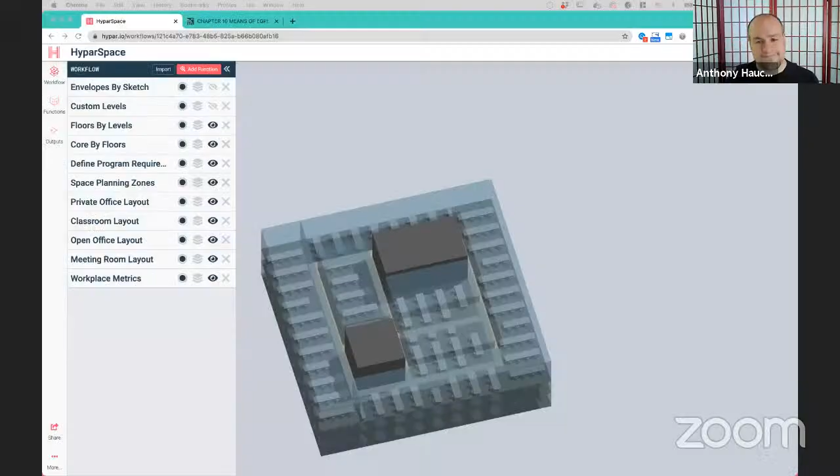Thanks for letting me share with you all today. So one of the things that we want to talk about is the history of overrides and how we got here. For those of you who aren't familiar with what we're looking at, this is something that we're calling HyparSpace. We don't have the best terminology or the correct terminology exactly figured out for what we want to call Hypar space, because Hypar is not space planning, but you can do space planning on Hypar. And this is an example of one of the more fleshed out things that you can do on the platform.

Hypar Space was envisioned by Andrew, who is here with us today. One of the things it shows very well is this transition, this evolutionary history of how overrides came to be and how powerful they can be.

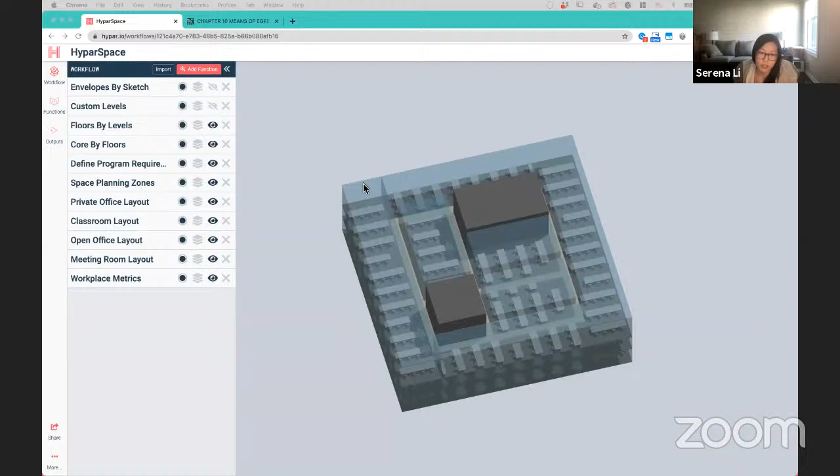One of the things we can see here is you get a bunch of floors, and then there's this automatic layout of a couple of cores and a couple of spaces. What ends up happening is you can go into the space planning zones, or since there's a lot of information happening, you can just click on every space you'd like to change something about, and then change the program type. So downstream functions are listening and saying, oh, if this is an office, I'm going to lay it out a certain way, but if it's something else, I'll lay it out differently.

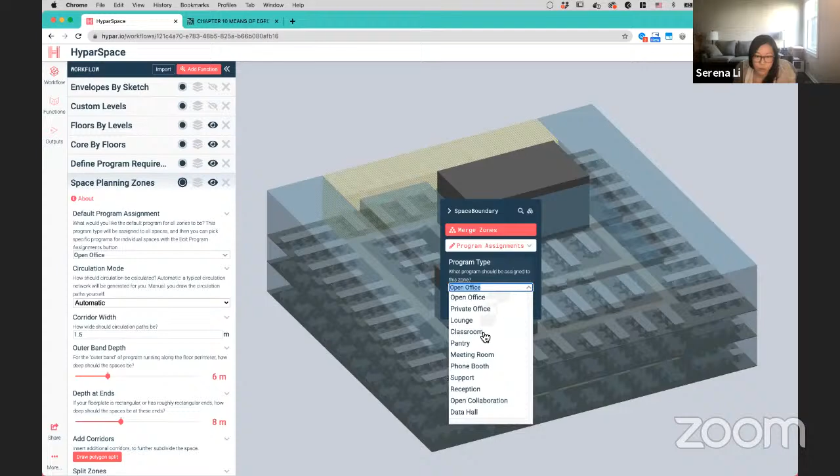So if we change the program type here to something like a meeting room, for example, and hit save, we can see that just this one space turns into a meeting room.

The evolution here is that it used to be we would have inputs for a function — we'd say everything I get fed, I'm going to make an open office. That's how it started, making all of these open offices. What we can do now is start saying, actually, I the designer, or whoever, I know better, and I'd like to change this to be something else.

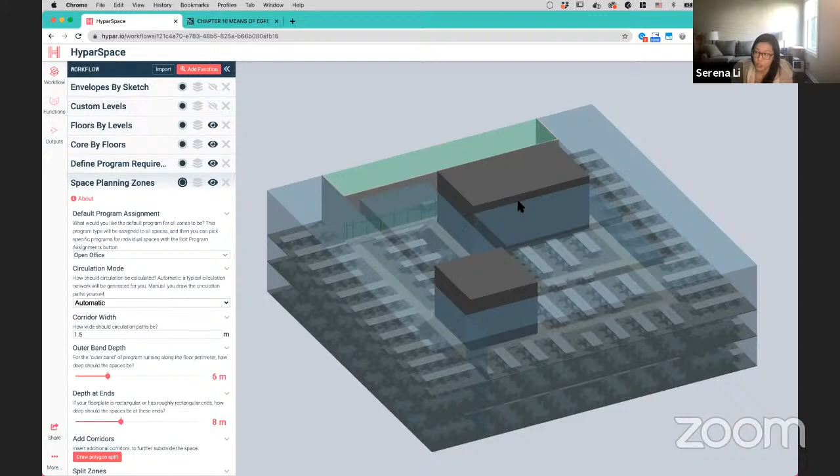So here, well, I chose a very strange and awkward room to make a conference room. I'm just going to go ahead and change that to something a little less weird of a layout for a long skinny space.

But you can kind of see that, okay, we can say this is going to be one kind of thing — and oh, I'm clicking on the wrong thing, my apologies — and that we also want this to be something different, and so on and so forth.

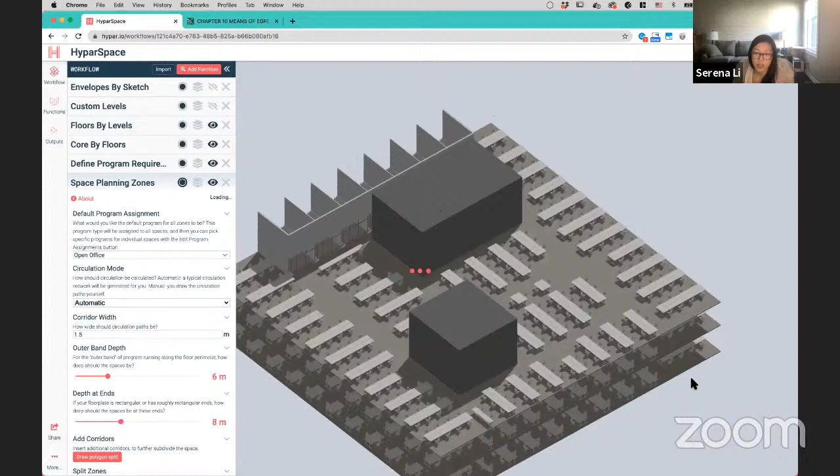This is how we can think about what we've been calling overrides — I personally like to think of overrides as just fancy inputs that you can change by element. Rather than a global input for everything that functions do and how the logic is supposed to work, we want to say, actually, they vary, and I want to work as a designer in concert with the generative design programs rather than just being handed a black box for what it is we want to do.

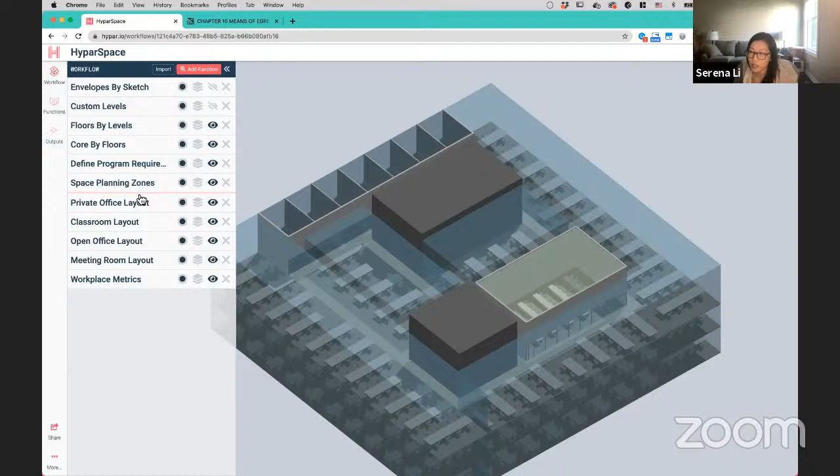I want to linger on that last point, because what you're seeing here is generative design happening where all of the spaces were drawn, corridors were created, cores were created, and you've got a space layout.

But this generative design was very simple and just said, I'm going to make everything open offices. This is a case where it's not like our design got us 90% there — it was obviously not correct. But it's okay, because we're able to have this human intervention right away.

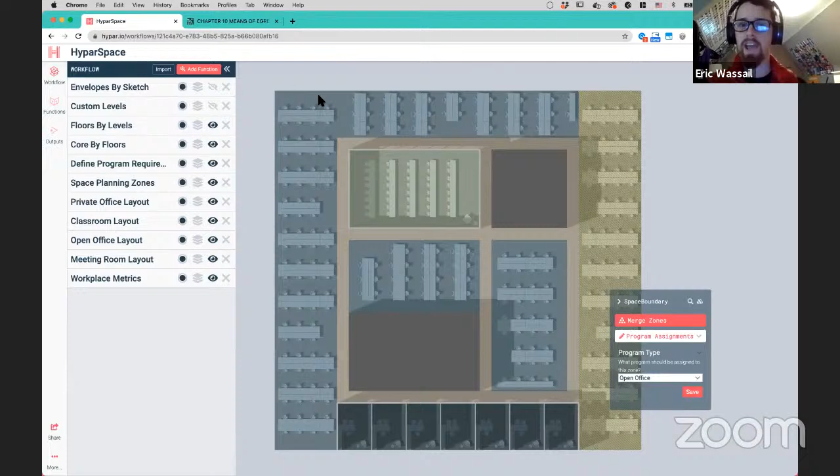Even though it looks like you have to click every space type and make these modifications, it's still human-in-the-loop generative design, because the generation happens first and the human gets to provide input and direction on top of that, which we think is unique to Hypar — a lot of other tools are manual first and then generation gets layered on top, or there's generation and that's the end of the story.

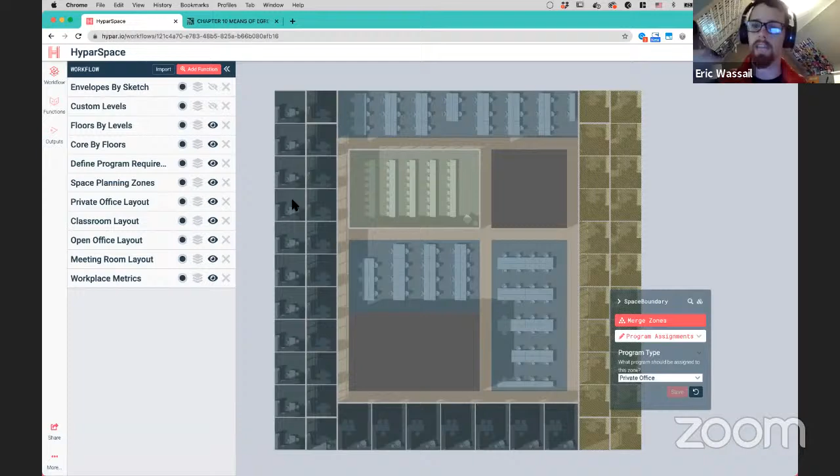You generate your design and can take it and start doing manual edits afterwards, but then you're leaving the generative platform. So this we think is a unique strength of ours — that we're generative first, and we've added this manual intervention capability through inputs on elements, like Serena said.

You can click on an object and say, make this one a little different, change the type, and there are other things we can override, like locations and positions, and it's always responding to a generated design that precedes your edits.

Yes, these are really good points. One of the things I'd like to show is, like, the last thing I was changing is just the category of this type of space. But actually everything down to the geometry, depending on how we configure the functions and how function authors want the logic to work, is configurable.

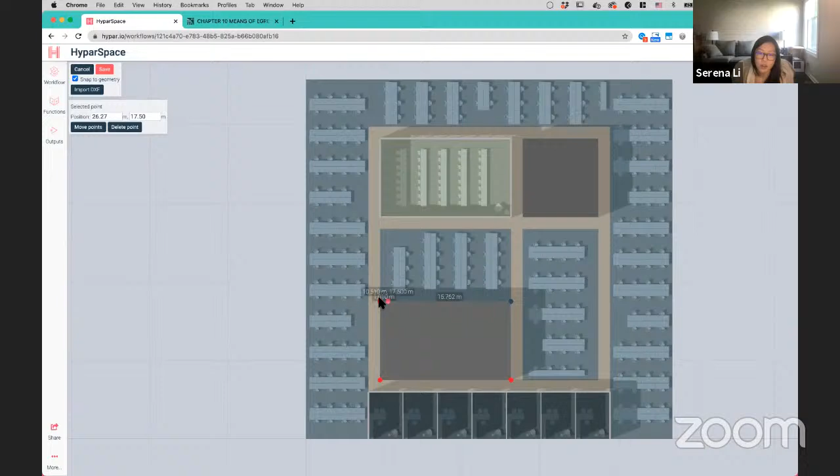One of the things we can also do is take this particular service core and say, actually, I want to edit this core. I want this core to be enormous for some reason, and I want it to take up the entirety of this whole section, and we can just do that.

So cores aren't the primary purpose of a building now, most of the building is core. But what we could do there is core by floors - it gave us a first estimate of what you might want to be doing. Now what we can do is go ahead and edit what comes out of it, and it runs recalculations and does the appropriate things, taking into consideration what a human wants to happen.

And all the previous edits you had made always persist, right? Generation reoccurred, but your modification of that space to be a classroom, and the bottom bank to be a bank of private offices, all continues to exist and continue in your design.

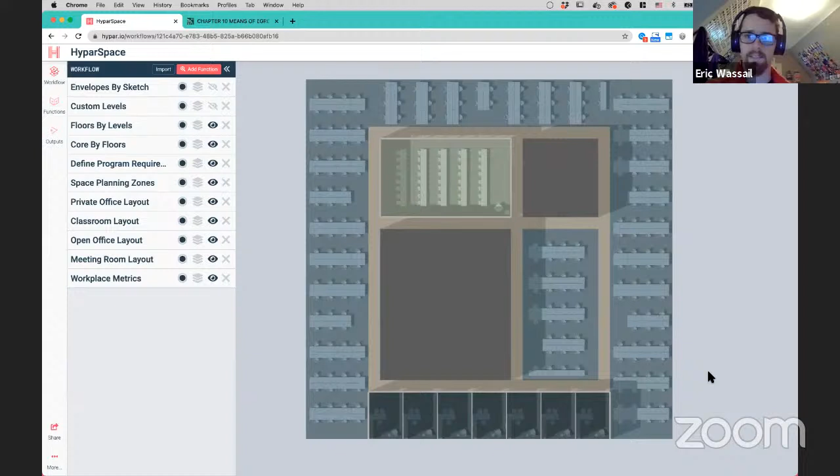Yeah, I wanted to interject on that. We so far think this is actually unique to Hypar - this ability to intervene in a generated design, regenerate the design, and preserve all those changes.

Now, of course, if we radically change the shape of this building to the point where that meeting room no longer exists, we're not going to preserve that. There's a certain tolerance for change that the override is going to try to maintain, but the idea is that the computer should not override the human's choices as much as possible.

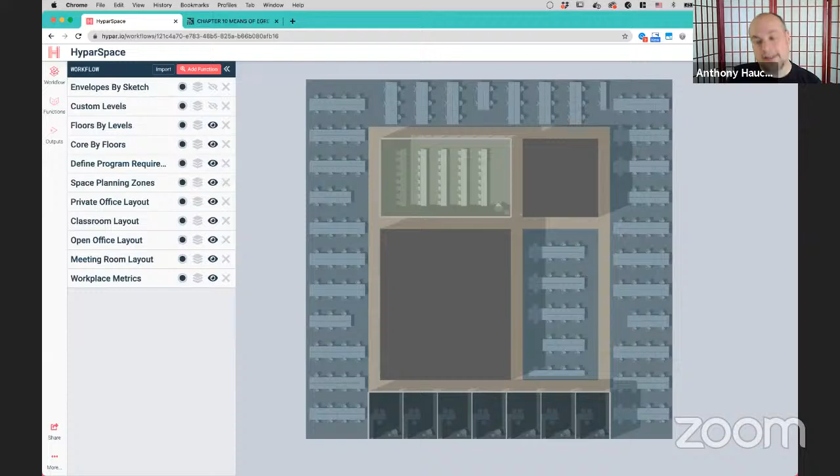And even if we change the shape of this building, that would essentially be two human interventions, one essentially making the second one impossible. So the system mediates all this so that you can arrive at a design that is co-designed with these algorithms to arrive at a good solution.

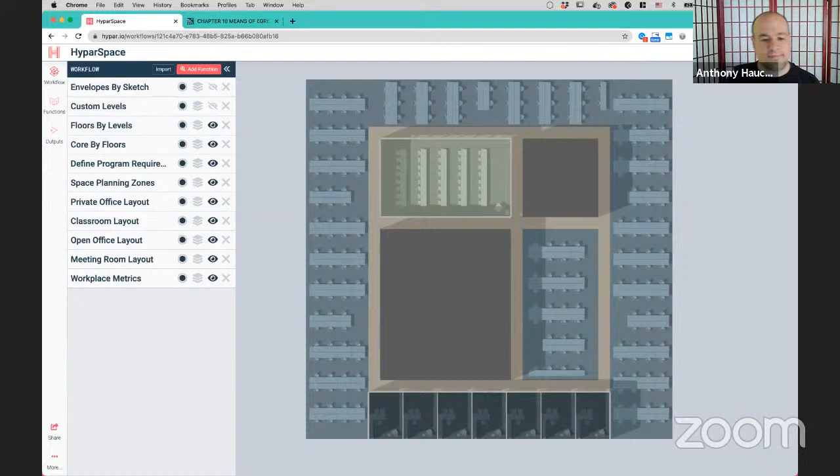Yeah, absolutely. And you say that's unique to Hypar - I personally feel that too, because in so many other programs, you do the parametric part, the computational part, and then you bake it or export it, and then you have to make all your edits afterwards. I'm really excited to be working on something where we consider both of these factors together as well.

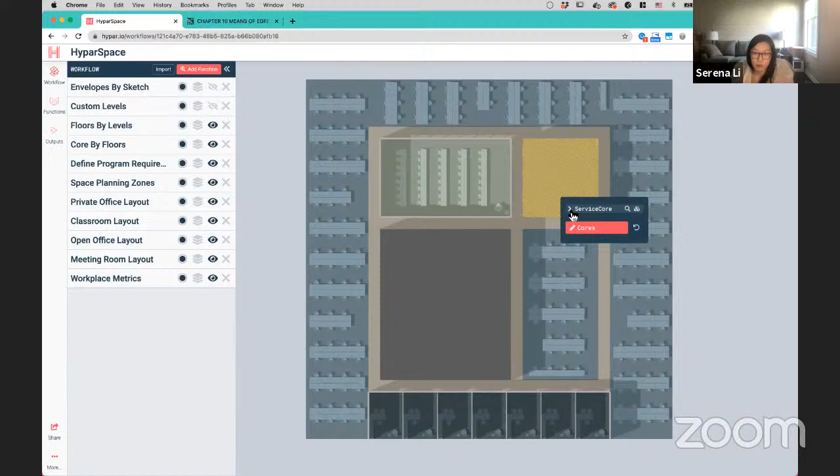Now that we have this, one of the things you'll see in all our examples so far is, okay, like cores. One thing I haven't opened a lot is the side here, but you can actually see each one of these is a function - a modular piece of logic that talks about what I'm going to create, how I create that, and what kinds of things I need to create this.

Core by floor originally took in the size of the core that you wanted. And when you say edit cores, you can basically click on the core directly to edit it, or click on the core here and then edit its shape as well.

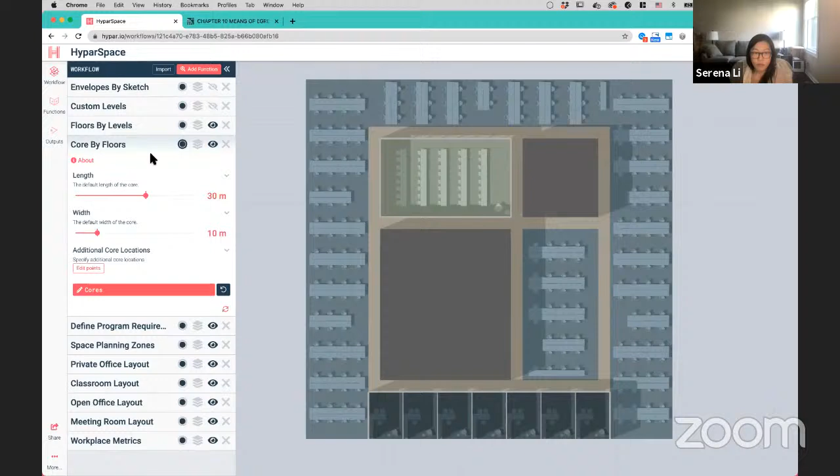But up until very recently, we could only say that if your function makes cores, then you can go ahead and override what happens with cores. And if your function makes something else, you can override just what happens to that other thing.

One of the things we started to realize is that a lot of functions depend on - they want to vary, not based on the thing that they create, but based on something that they depend on. So one of the things we started to add now is the ability to do what we call cross-function overrides. And again, I hope these aren't words that stick around, but the idea for cross-function overrides is basically: I want to set this to vary based on one of my dependencies.

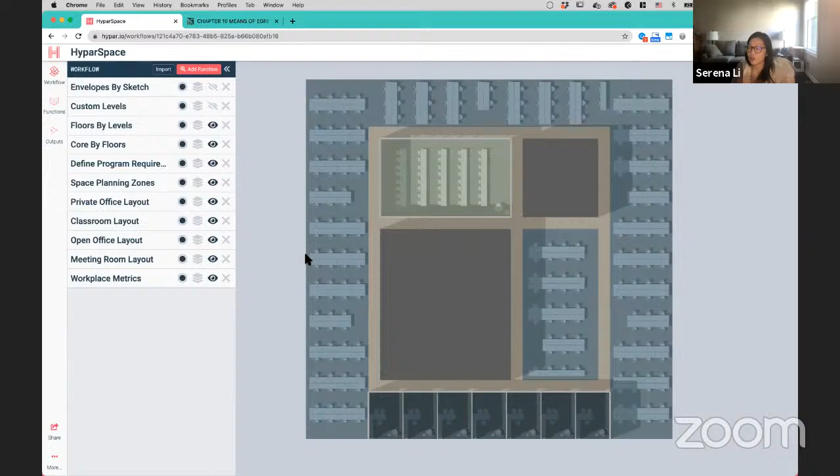And I think of cross-function overrides, again all overrides, as basically a fancy form of input, and overrides are basically inputs by element. So as an example of that, I will add a function that I just created earlier. I hope everything works great.

So if I add this - this is fresh functionality, I hope I didn't make any bugs. Okay, so if we go into exit stairs now, we see - and I'm just going to go ahead and permanently hide core by floors.

So what does the logic of exit stairs do? What did I, the function author, basically say that I wanted it to do first? It just creates an exit stair in every core.

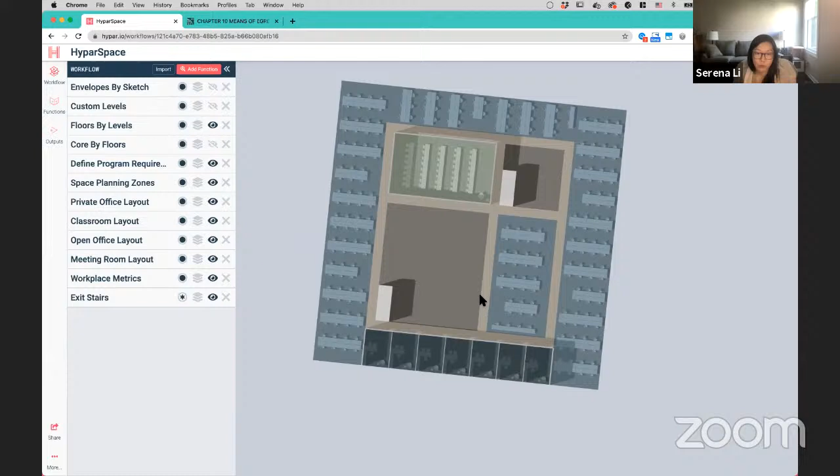That's its job. And so, Serena, how do you decide how big the exit stair should be? Oh, great question. Well, you'll see that I have pulled up here the IBC, which I'm not going to make everybody read here, because you're going to read it to us.

But I thought that exit stairs was kind of a nice example of a real world problem that is complex enough and has enough going on that it would really benefit, as many if-else's and as many things as we want to be able to support, we may not know the entire code or have understood how to apply it in every scenario, and could really benefit from overrides.

Well, I'll also add, this is the kind of problem that Hypar wants to solve in general, because it's formulaic, even though it's complex. It requires you to get better at designing exit stairs, or have certain expertise in this. It's a formulaic complexity. If you understand the code and you understand your building, you should always come up with basically the same exit stairs.

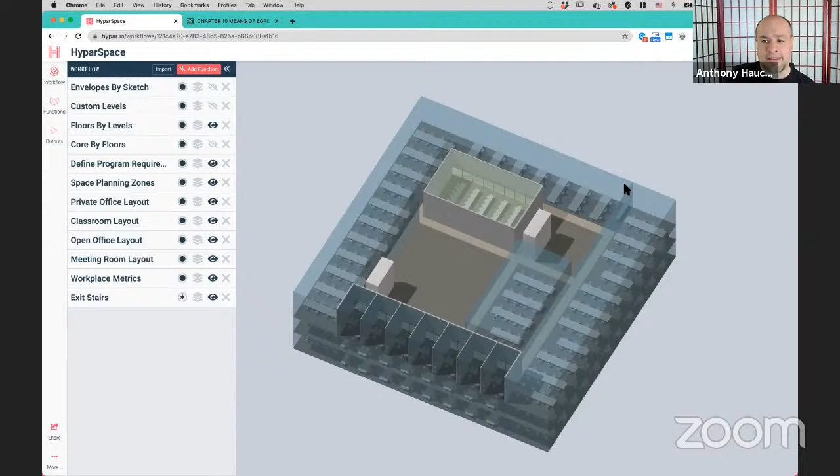So way back in the dinosaur age, when I worked at an architecture and engineering firm, we had a guy who did fire stairs. That was his job, because he understood the code so inside and out that's what he would just do every day. I really want to give that man a better life. He should not have to draw fire stairs anymore.

Right. And this is something we can automate, because there are procedures that need to be followed, given certain shapes of the building and certain properties of the things that Serena is going to get into. You can have something that will tell you, you said you wanted exit stairs like this. Here they are. They are sized correctly for you according to certain properties.

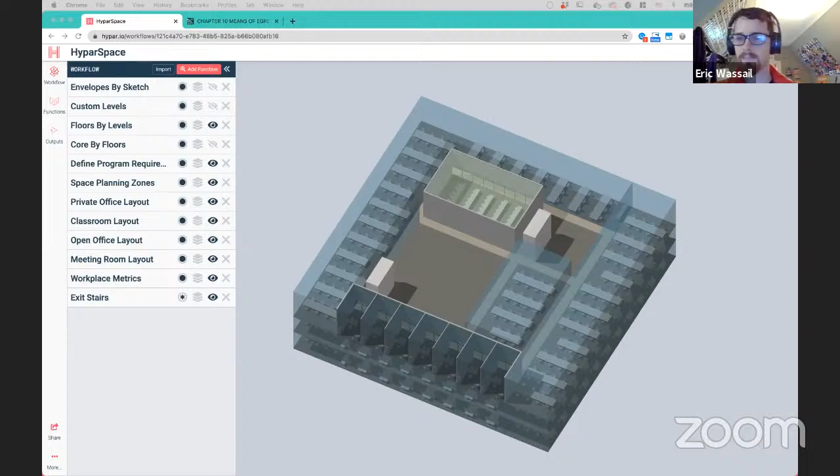And some of the kinds of things that go into how big your exit stairs are required to be are, as an example, occupancy group, which is basically a proxy for how hazardous is this building, and how ambulatory and capable of self-preservation are the people who are in it. Whether or not the building is sprinklered a certain way or has certain kinds of fire protection. How many people are there? That's one of the biggest ones.

There's also just absolute minimum dimensions that are specified in the code, whether the stairs are accessible, so on and so forth. I did not include all of these things even a little bit, but I do have some of them in here, so we can take a look at how that works.

So one of these things that we can see right now is I just added this exit stairs function. And this star means that a function came with additional messages that it wants you to know about. So what are the messages that are here? It says an area factor of 150 for business use has been applied by default per table, whatever the business area is.

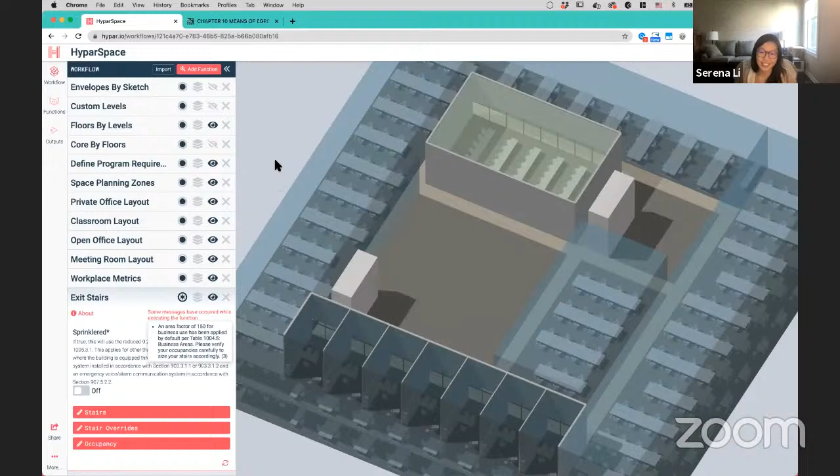So basically it's saying, I took a guess at how many people are in your building. But that might not be how many people are in your building. So it's just warning you, like, this is a guess, you are responsible for the outcome.

And to make my life a little bit easier, actually, no, I think I can still do this. So what happens then, it says, oh okay, the occupancy per floor right now, this particular floor has an occupancy of 155. If I change the occupancy to something like very large, we should see that the exit stairs get bigger.

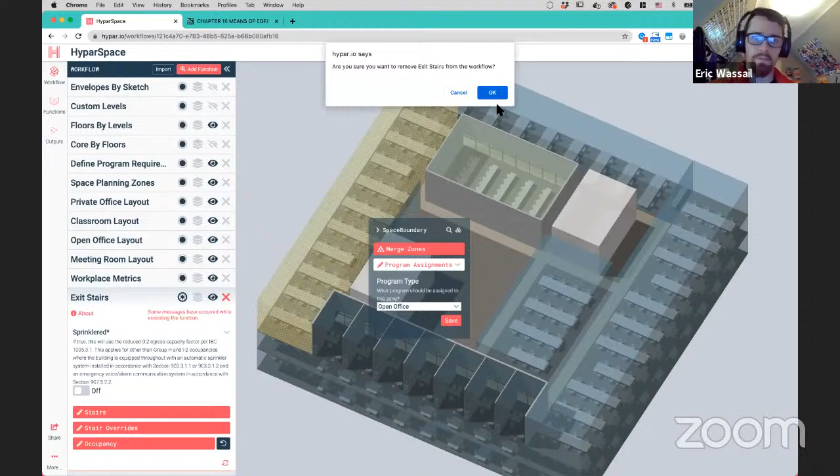And that right there, hidden just in that little dialogue, is a kind of cool moment where floors didn't used to know about their occupancy. But when you add an exit stair, and maybe we can see that real quick, when you click on the floor, you get nothing. Yeah, that's it. Floors are just a thing that was created by the floors by levels function, and they're there, they were created based on their sort of upstream inputs.

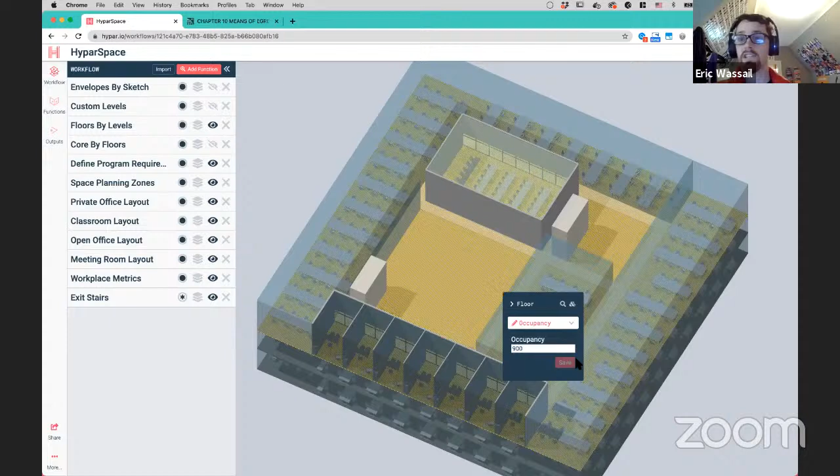But now with exit stairs back in there, exit stairs care that floors have an occupancy. And so in the style of fancy inputs, exit stairs said, one of my inputs is an occupancy for every floor. And so now floors have this kind of additional capability, this additional data on them.

And I'll add there's another subtle advantage going on here, that the developer who made floors by levels didn't have to offer source code to have it modified by somebody else to make sure that occupancy could actually be calculated using the floor. So later, something developed completely independently can now add those kinds of pieces of information that are critical to make these calculations without affecting the original component.

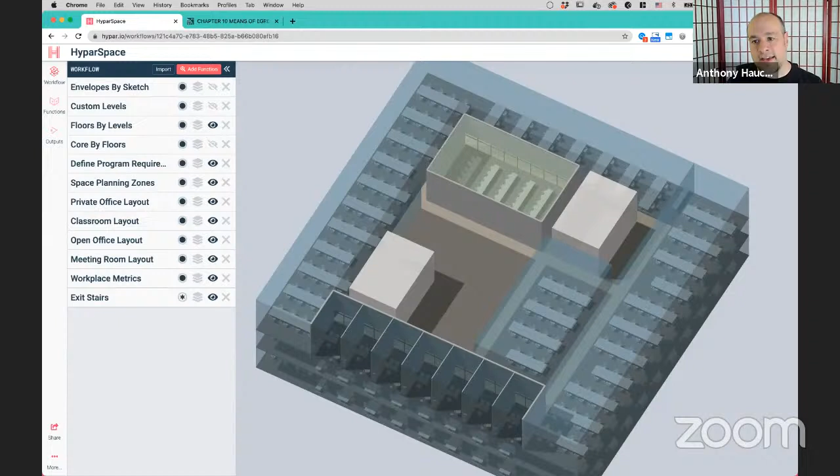So it's not like, say in Revit, where you've got a family and it's like, oh, we didn't put that parameter on, let's put that parameter on, let's share the family around. This is all coming in ex post facto into the workflow so that you have a much smoother experience. You're not petitioning Hypar to add some extra information so you can make this calculation. You can write your own function that does it.

We actually have a question in the chat about how this works. And just FYI, Andrew, you're responding in the chat really nicely, but it's only going to the panelists. Anyway, the question is from Andrew - a different Andrew. So basically the question is, do downstream functions then affect upstream functions?

Kind of. So basically, we do not consider downstream functions to have ownership over upstream functions. Therefore, if an upstream function says my floor thickness is, I don't know, 6 inches or whatever, a downstream function cannot say, actually I think this floor has to be a different depth. What the downstream function can do is say, I require information that's not inherent to this floor, please give that to me. So we think of the downstream function modifications as being additive, like making the data richer rather than actually modifying what comes out.

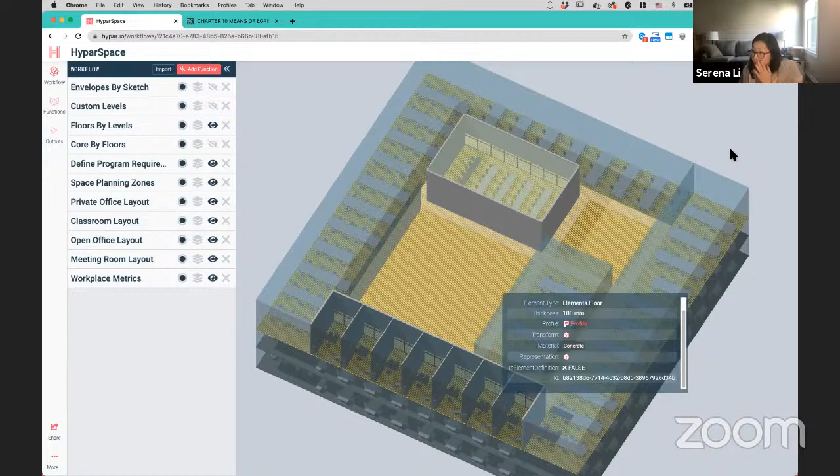Because again, as you saw before, floors - so if I remove exit stairs again, we can see that these are all the properties that exist on floor. Floors do have a thickness, a profile, where they live in space, et cetera, et cetera. They do not have occupancy. So the occupancy was additive basically by exit stairs and is not a modification of something that the floor itself was supposed to set, if that makes sense.

It's a great question and a good observation. How are we going back up there? We're actually not - we don't have to go up to floors to modify them because, as Serena said, it's adding information only. And this is kind of an important element of the customizability about Hypar.

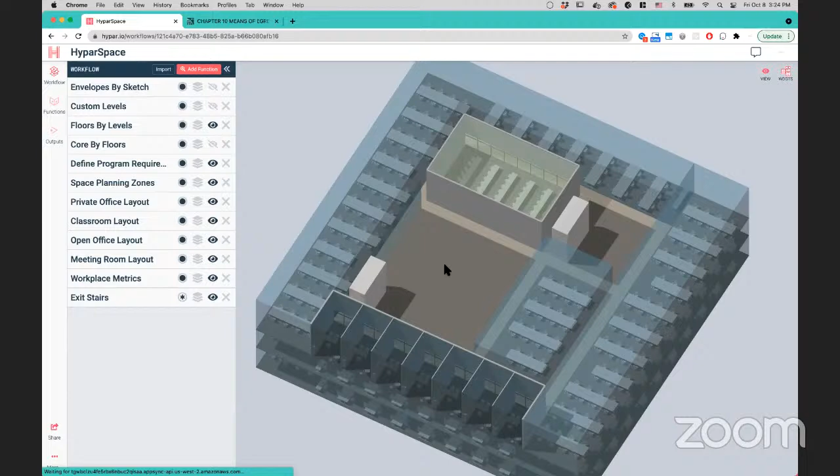If you have, let's say, part numbers that you only use within your organization and you need to associate it with, not floors in this case, but let's say columns instead - you can start having subsequent functions inject additional information, those part numbers, using our standard column function without you actually needing to modify that column function. So as always, Hypar is very composable into new use cases.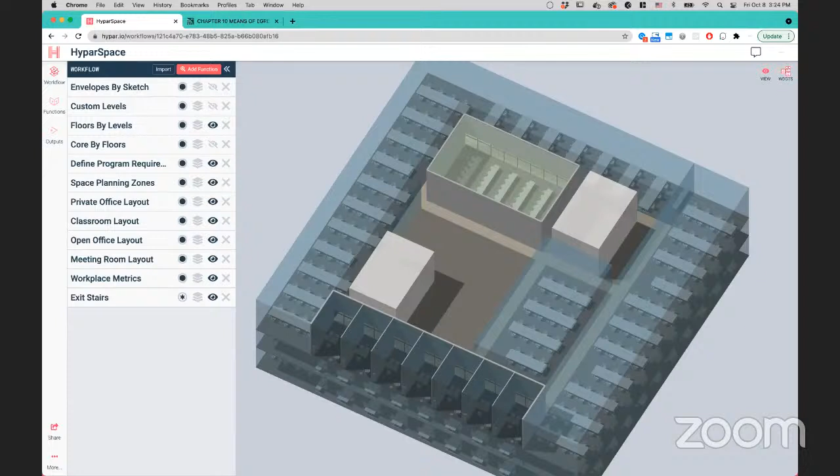And a great follow-up question on the chat is, then that means that the information isn't necessarily available to another function that might also need occupancy. Great question. We are thinking about this problem for sure, and want to make sure that we do it right. Our very first stab at this, in the current moment that is available, is that a function can request something, consume it by itself, and then discard it.

It is also possible, if you know that exit stairs requires occupancy, like you also require exit stairs, you can go and look up in exit stairs basically what the value that it assigned to occupancy was. Obviously this is not ideal because there are many functions that might require occupancy and they can't all circularly depend on each other. So this type of property addition is something that we're considering - does it mean that all floors end up getting an occupancy? Does it mean that we have some kind of intermediate step? That is a problem that we're working on.

And things will continue to evolve. Right now there's no occupancy on floors, but like Serena says, we could always add that - that could be just an inherent property. Or if we see a lot of recurring use cases and a lot of duplication of a particular override, well, that's the case where maybe there's another function in the stack.

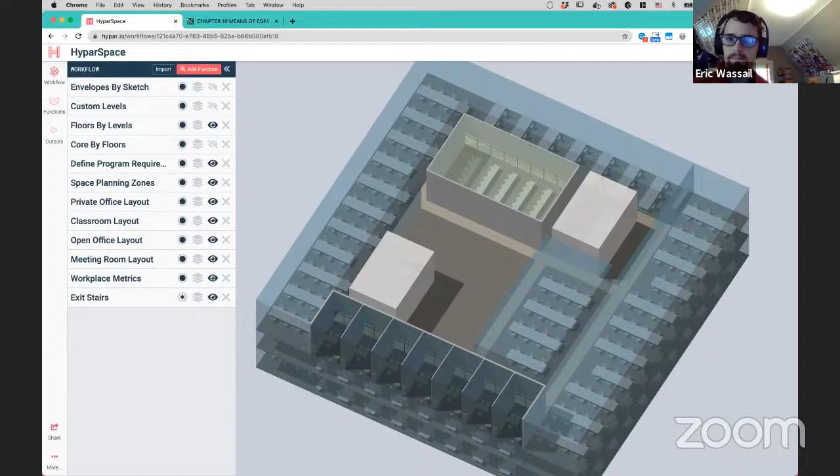So a couple of other things I was going to show about how the overrides work, and there's a great comment in the chat about modification stats, which we don't demonstrate exactly, but we do have a hint at. So one of the things inside this long piece of text is: if your building is not group H or I2 occupancy, and is sprinklered a certain way, and has certain other conditions, you're allowed to use a reduced width factor.

So one of the calculations in the code is, for every n people, you need a certain number of inches of width on the stair in order to make it compliant, to qualify as a stair that can carry this many people in an emergency. You're allowed to use a reduced capacity factor if your building is sprinklered and has these certain systems a certain way, because they assume your building is safer, and it's okay if it takes people a little bit longer to get out, or things aren't as wide.

So one of the things we should see is that this is a slightly smaller number than the default. And if we say that my building is sprinklered, we can now see that they're a little bit smaller. One of the interesting things we can also see is that if you click on a stair and expand all of its properties, this function keeps a history of why the stair is what it is. So it first says a width factor of 0.2 was applied due to sprinkler system status.

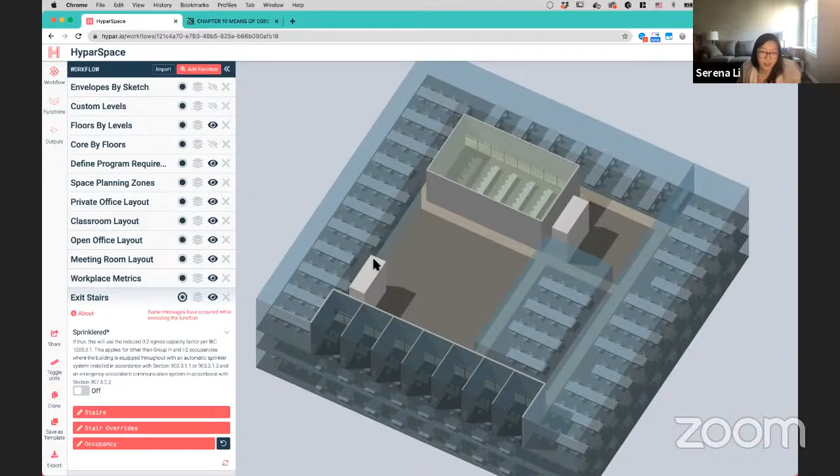I can go into my stairs override and say that my minimum tread width—oops, I don't like meters, so I'm going to make my units feet since the code is in feet. So I'll go back here again and say, okay, the minimum tread width, this is basically 44 inches, right? But rounded weird because feet to inches. Anyway, so I can say that I actually want my minimum tread width to be 3 feet only.

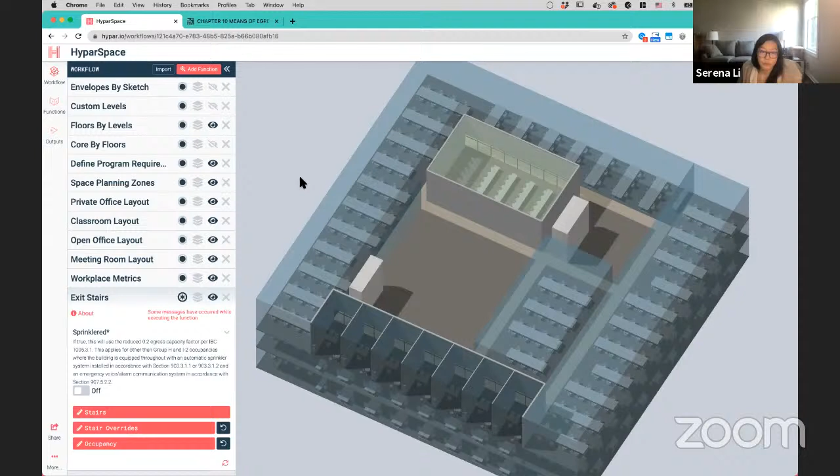And so if I save this again, what we can see is that it only applied to this particular stair. It was not a universal thing. I just said that this particular stair is not accessible, or for whatever other reason, I decided its minimum needs to be 36 inches, and applied that here only.

And then what we can see here now is, again, it continues to explain to us, like, it applied the width factor of 0.3. It was increased to be a minimum of 44. It applied an override with a minimum tread width of 36 inches. So then it checked the factor again and turned it back to 36 per user specification.

So this isn't quite a stack, but we have all of these different reasons that something can happen, like the designer knows better. We can keep track of all of this for you, and you can understand where something came from generation versus where a decision came from a user, rather than a black box generative first guess at your solution.

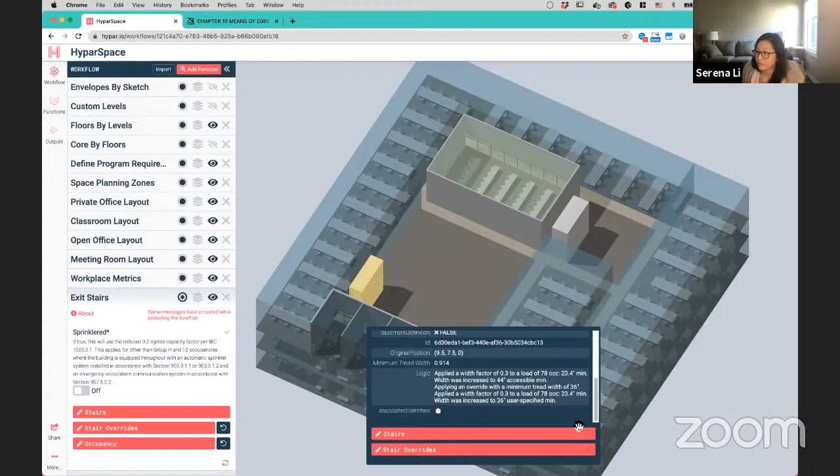I think this is worth highlighting, something that's also been said in the chat. The interaction here is actually very fluid from a user point of view, which is really cool. This is generative design first, with code and logic embedded inside it, but with the additional capability of you clicking the stairs and saying, no, I wanted them to be 36 inches, and that's just what happens. Something you've added here that we haven't seen a lot on the platform, but I suspect we will see more versions of, is this idea of the logic stack, which I think is really cool.

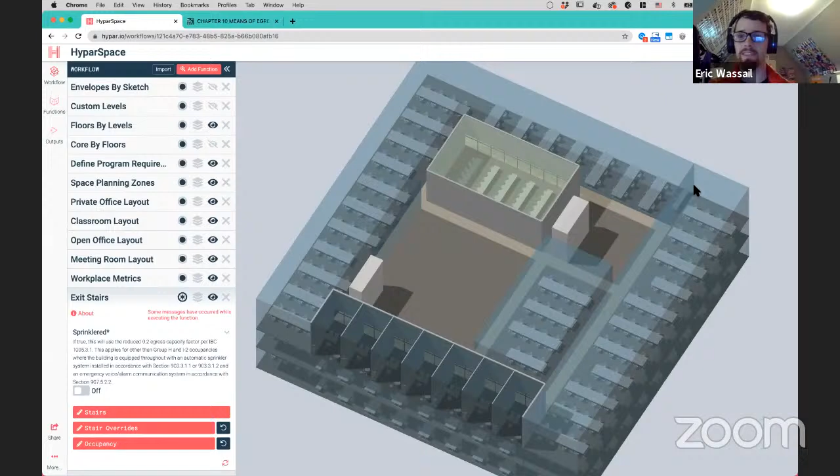Explaining how did we end up where we are. There was a lot that happened internally that we want to expose to the user. We always want it to be clear why things are the way they are inside my design, given the interplay between this function and other functions, augmenting data, and you as a user. But the actual interaction is very clear now, which is kind of sweet—click on thing, make modification, be told a little story of how we got to this width.

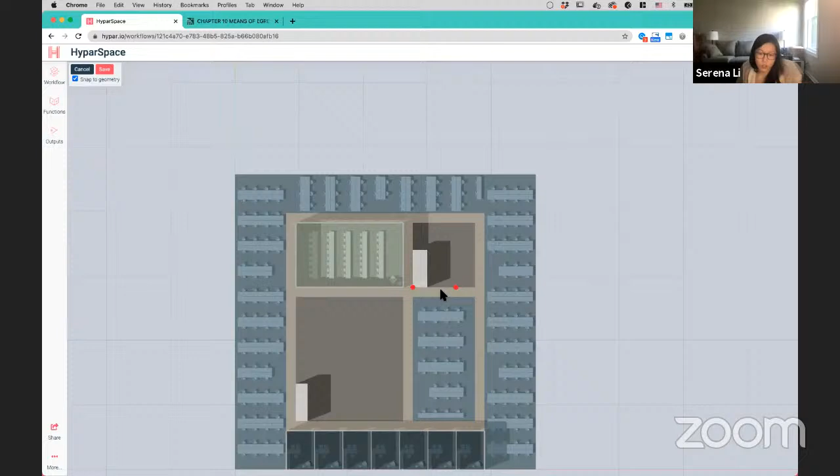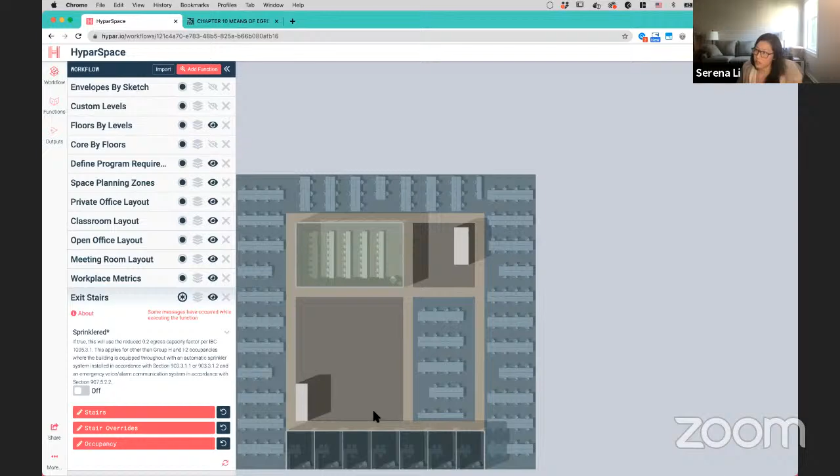And again, these are all things that persist. If I take this stair and say I wanted to actually move it from here to over here, somewhere inside the core, because I didn't like where it was before, the logic stack sticks with it. It remembers that this is the stair I wanted to do something different with than this other stair. So it kind of allows you to track decisions and also track automation, and how well we work in concert. I think that's pretty exciting, at least to me.

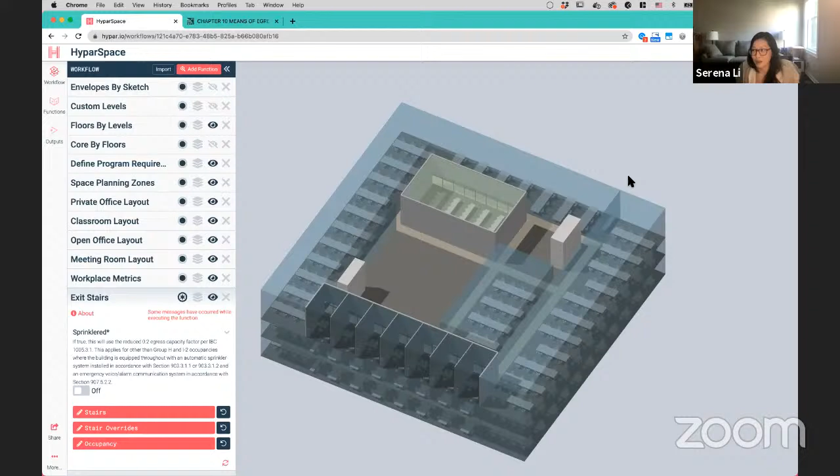And then I'm going to move over to localhost, which is very developer of me. But we have some things in flight that Eric's worked really hard on that I'm excited to show. It's not available yet on Hypar because we're testing it internally, but I couldn't wait to show it off, so I'm going to move there now.

Just go here. This is very exciting. Talk about previews—it's about as bleeding edge as it gets. As bleeding as it can get. It's not even here officially. So this is just the same workflow, but hosted by me now.

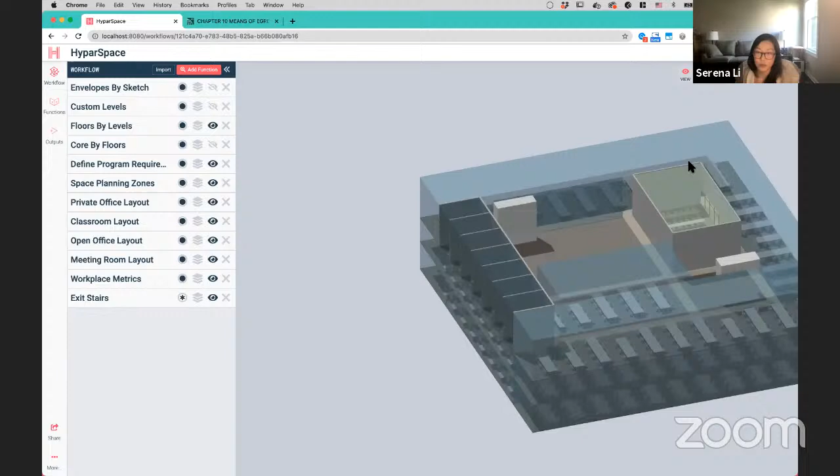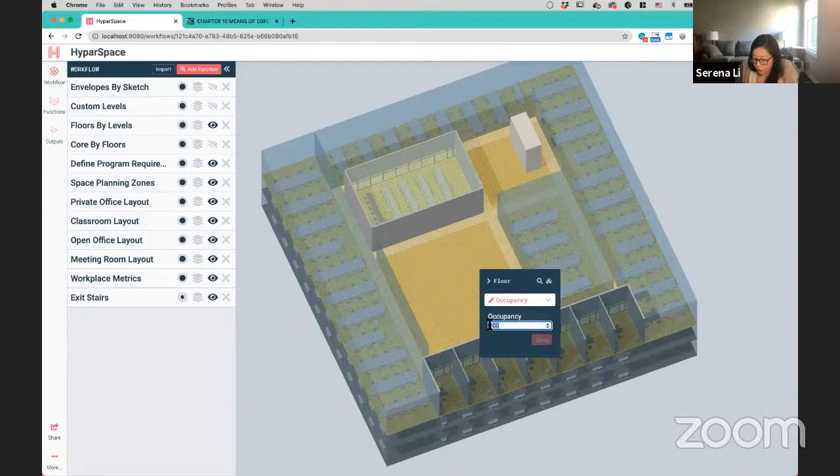I'm not sure if people noticed whether it changed size, but I'm going to try this again to make it more obvious. So if we make the size of this bigger and save, I can say here's a very large exit stair right here—that should get the job done. Two substantial ones. It might have gotten a little confused by what I just did.

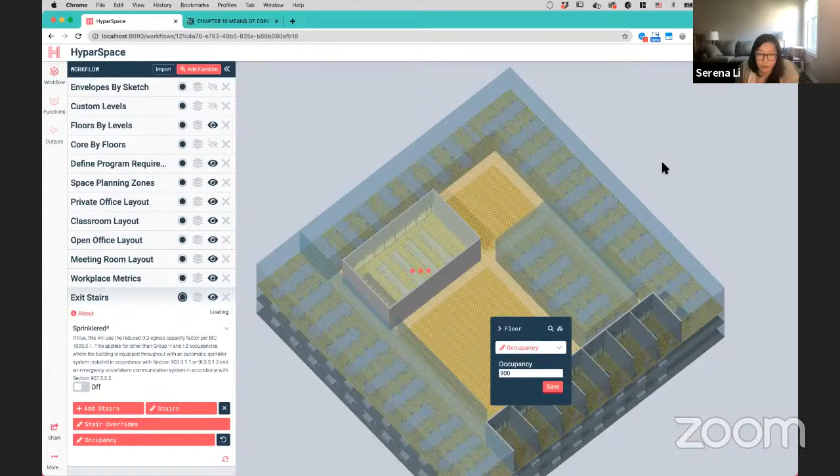I wrote this earlier today, but in theory—that would be me as a developer error, not a platform issue—basically, if I edit the occupancy again to something very large and have my big fat stairs, if I delete one of them, the other stair gets much bigger.

Now, nobody would actually want to build this, so obviously this is something where, oh, actually, I don't want that. And in fact, I don't want to put a stair in my core at all—I want to put it punctured straight through this desk for some reason. You can also go ahead and add that as an override as well. You're the designer, you know best. I want stairs everywhere.

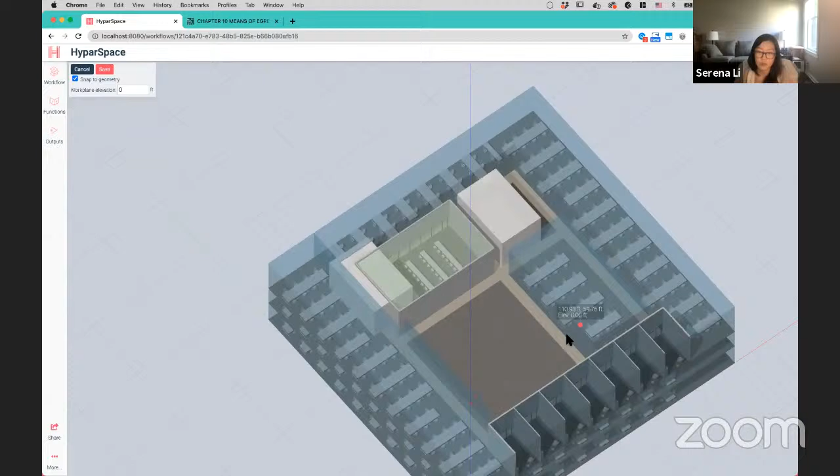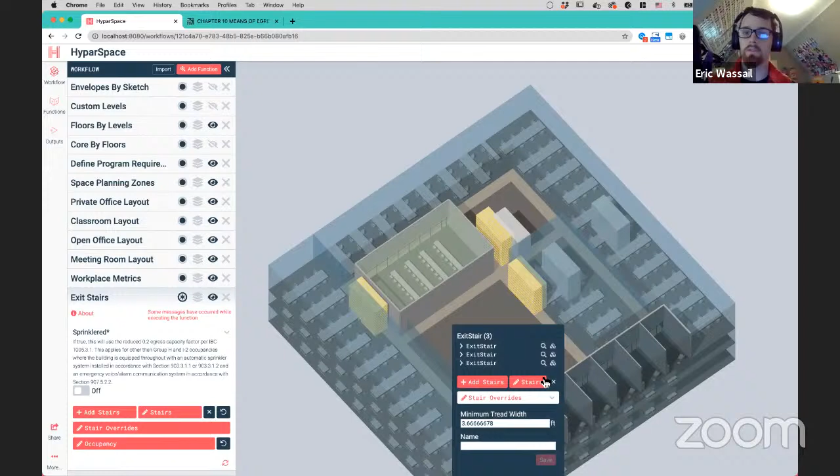The feature being highlighted here is even fancier overrides, or even fancier inputs. Overrides have evolved beyond just being fancy inputs attached to elements, to being standalone creation of elements on its own. So this function that creates stairs can now allow the user to create stairs out of whole cloth, without even requiring a generated object to start with.

The exciting thing we've been talking about internally is that we start from this generative-first idea always. What we could have done as a platform is just started out saying everyone wants to be able to model, so we're going to make a modeling program where I can create columns and do other things. But we didn't tackle this—Hypar was started years ago, and we didn't really tackle this issue until now—of how to seriously add something new, how to model basically on the platform.

This has allowed us to think about addition and deletion and these other basic tasks as something that works with the entire ecosystem—but how do we know which is which? How do we decide that this stair is this stair after somebody has moved it? How do we know if somebody has moved it, changed its shape, changed its name? What is the true identity of the stair, versus the true identity of a room versus a desk or whatever? They're not the same thing.

The way we've been thinking about this is that yes, you create a generative design first. Then you want to change your variables and inputs by element. And if you want to change them by element, you might actually want to be able to add and remove elements as you do this, and so on and so forth.

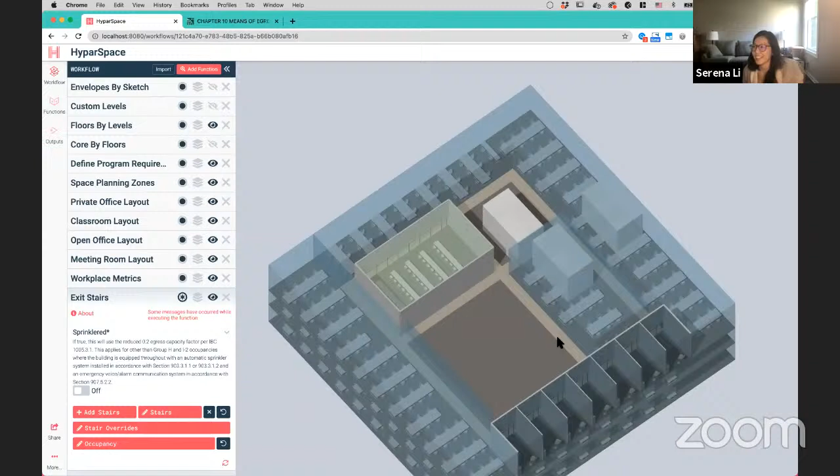This has been a really rich experience of thinking about design, where the generative program basically respects the intent of the designer, and can augment decisions, provide feedback, do certain kinds of checks for you, analyze, give suggestions—but not be in your way. You can see in my interaction I'm still directly clicking on things, still saying I want to add this, still saying whatever. So it's not necessarily that because it's all complicated deep down, it needs to be complicated for you.

And I think that simplicity has come out of basically solving this problem first before we thought about the other kinds of constraints involved in generative design.

This is also a sign of the sector we're working in. If we were designing phones, we'd set up the algorithm to stamp out the phones, and it would make a million identical phones. Whereas with buildings, we have a lot of identical components, but they get assembled in a million different ways, even in a single building. So we wanted to make sure the computer was helping you, not fighting you here.

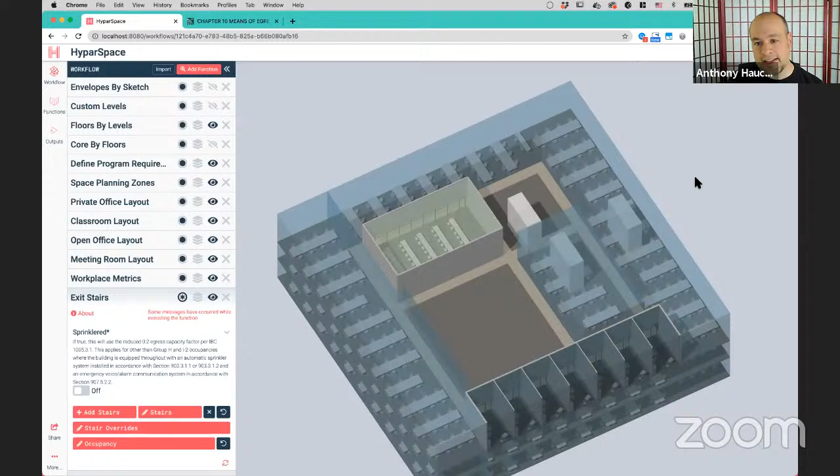That's why a lot of this functionality is in here. This is the result of a lot of conversations with many customers about how they want the computer to help them, not turn into their adversary as they're trying to get to a solution they know is correct.

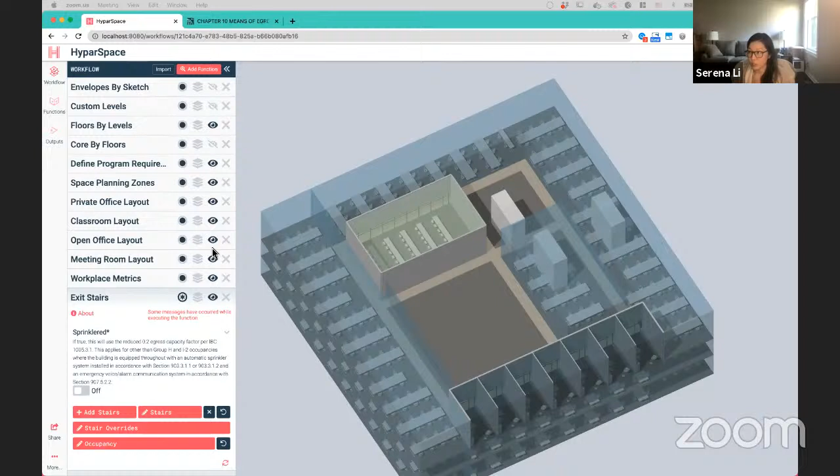I want to show how this differs from the combination of old style inputs with new style overrides. Let me remove this to make it easier to see. If we go to space planning zones, we can see the default program assignment is Open Office.

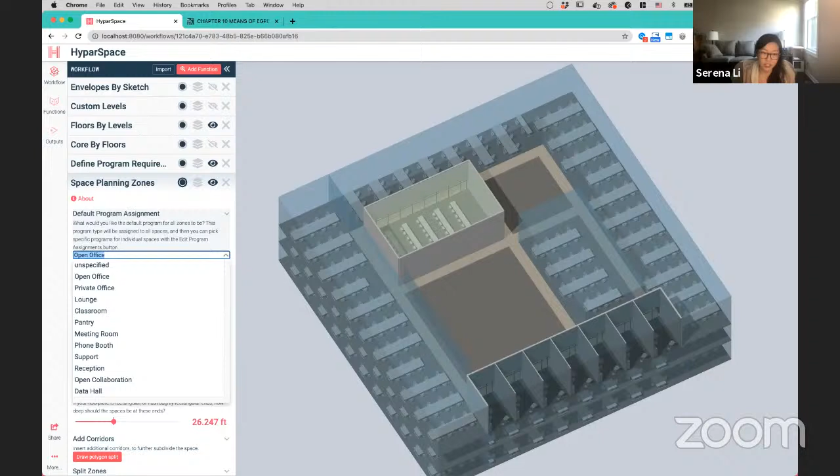A user might come here and say, actually I want everything to start out as a meeting room, because nobody wants to work at a desk in my building. You can do that, and it makes meeting room the default for the whole building. Obviously there are some weird meeting rooms, and I'm impressed these are doing a good job laying out furniture in strange spaces.

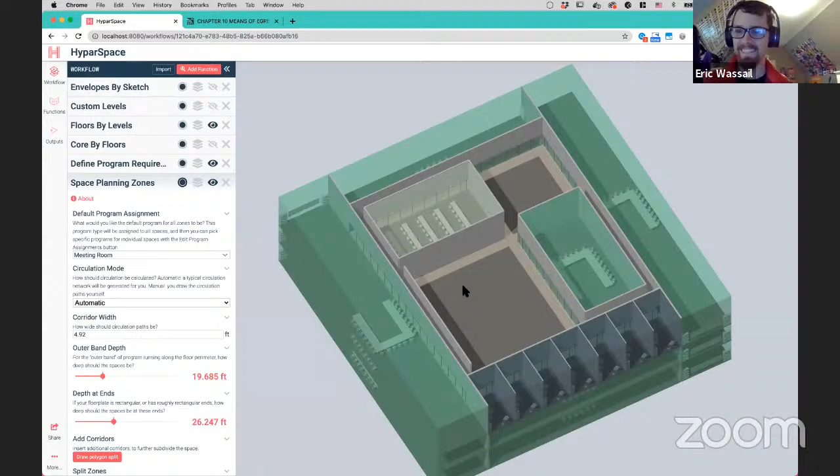It's not creating the banquet hall of my dreams, but it's doing something reasonable. There is a way to make it less weird though - you could scroll down and split that zone a couple of times, which is yet another kind of fancy input.

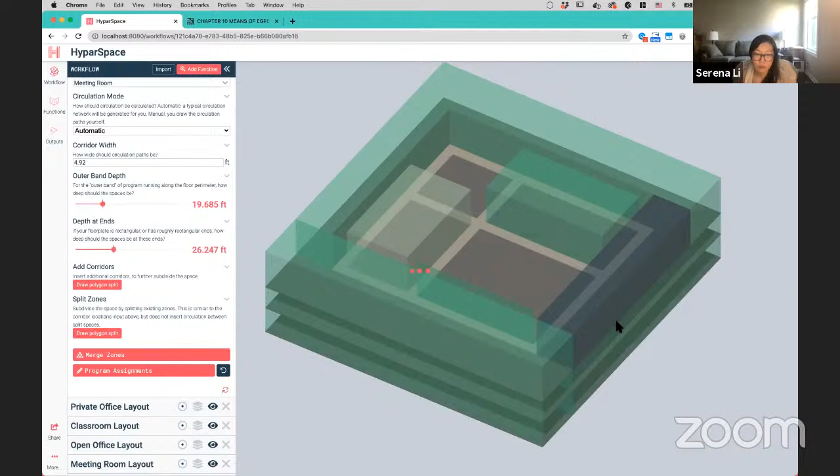I can say, I want my rooms to be smaller. And then we should see - yeah, here we go - now we have three times the number of desks, or, perfect, we should call this three times the number of collaboration points.

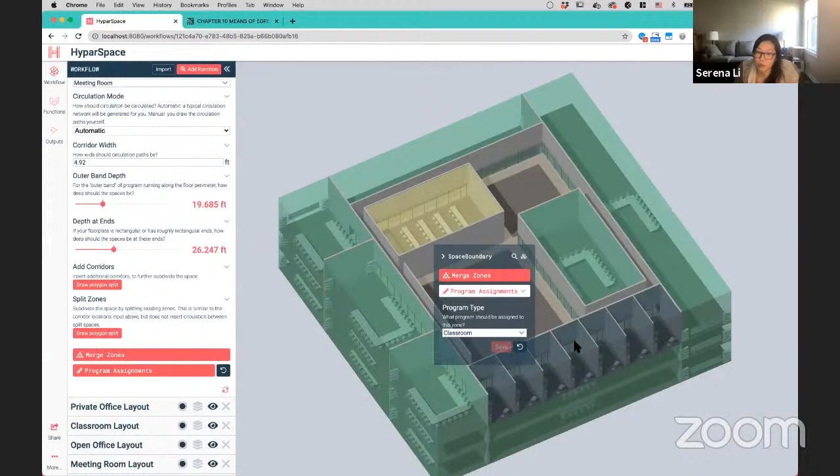But the point is you can see one thing that did persist: we had said this was a classroom, and this was going to be a private office. Even though I changed the default for the entire function, it remembers - the user's input is more important than my assumptions. So it saved this for us.

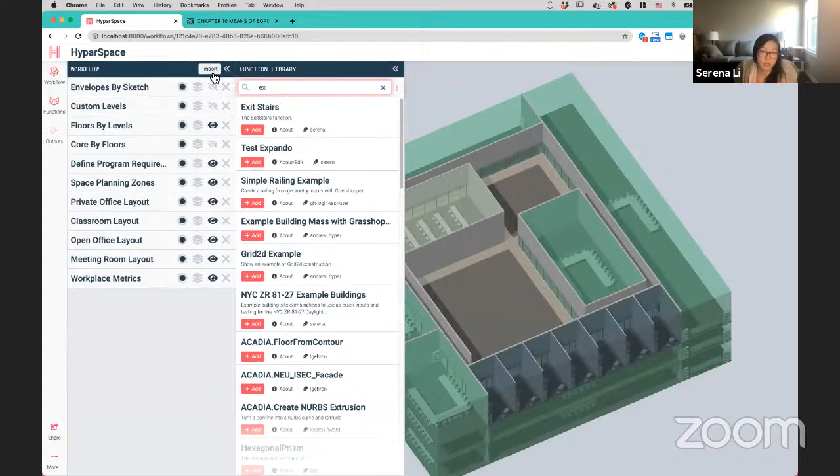The new thing happening here - oh, I had gotten rid of exit stairs, let me bring that back - is that besides the 'are you sprinklered' question, which is universal to the whole building, it doesn't ask you to give the number for your default occupancy. It's able to figure those out on the fly, without asking you for any kind of default input.

And if it had more default inputs, like a 2-hour wall rating or size of door or whatever, it would also be able to just calculate those on the fly. You don't need to duplicate this type of input between overrides and our traditional inputs.

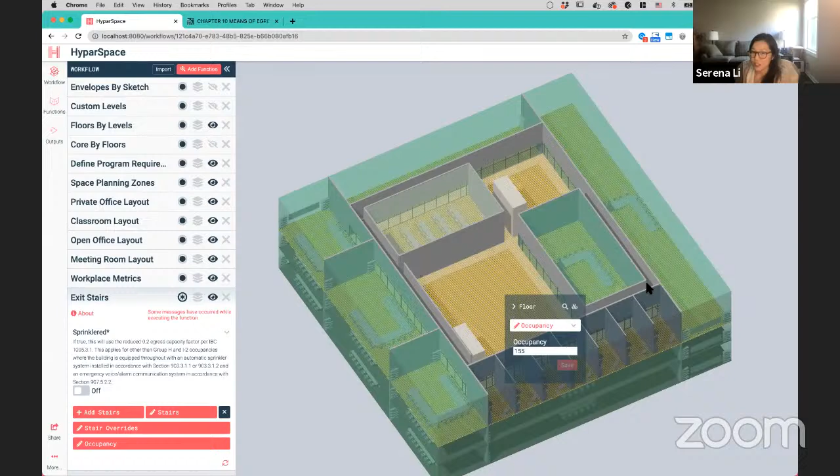We're having a hearty discussion within the company about whether there's still a place for default inputs you always go to, or whether we can just generate defaults within the function. Currently, the function takes its best guess, and we generate defaults inside the function for people to use.

That's something that, if successful enough, rather than having functions with very large inputs - custom levels is a perfect example. Before we had such powerful overrides, custom levels let you say 'I want levels at this height' by specifying the height of the basement, the ground floor, then a typical floor relative to the last one, repeating until you reach a penthouse. This isn't a tall enough building for all of that to come into effect.

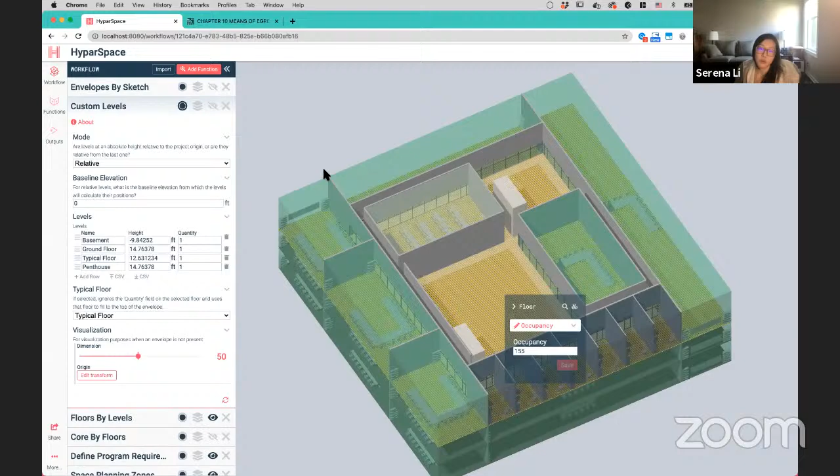But the point is we're managing this through lists, and we're considering moving this crazy panel into just being overrides, where it guesses what you want your levels to be, and then you can click on what comes out, override where you want your levels to be, change your logic or names there, and have a much more intuitive experience that people enjoy using more. Nobody has reported to me that they love this list.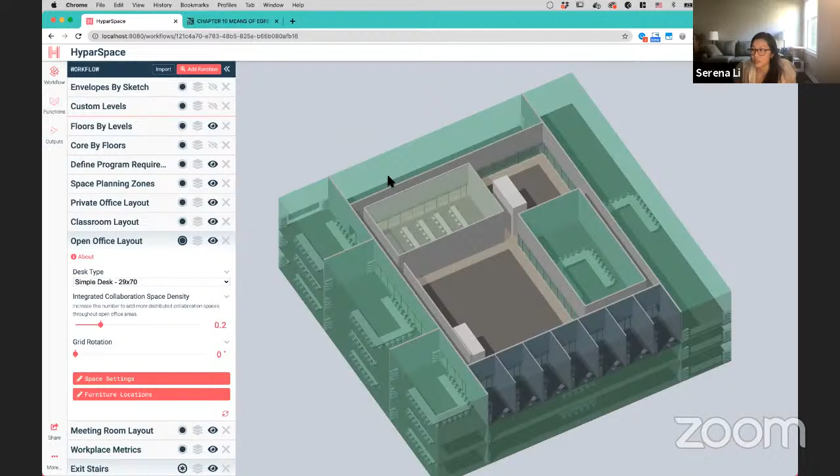Along that idea, nobody loves that long list style input. A term we've used, maybe even externally, is the 'jet fighter cockpit' problem of some generative tools, where you have all these options you need to set - you have to describe your building in text, lists, numbers, and sliders, all totally removed from the design itself.

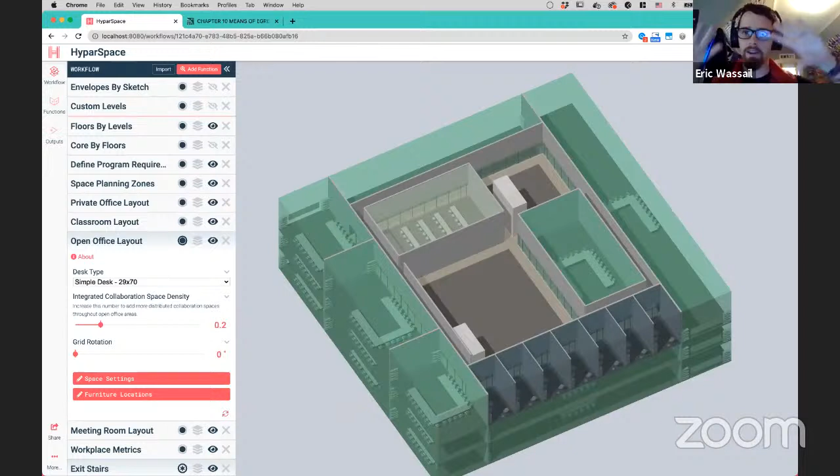We're thinking about how this can actually move a lot of that problem into the 3D model, and take those inputs and put them where your design is. Take your design choices that happen by clicking on a specific object, and narrow that jet fighter cockpit down to just the decisions that are actually relevant to the things you're looking at.

That touches on one of the questions in the chat about whether we could have nested generative design in smaller and smaller pieces. One of the challenges with making something like nested generative design is the number of inputs starts to expand wildly. If generative design occurs on a room by room basis, how are you supposed to manage and understand the number of inputs, the number of human intentions that are trying to be captured in the generation process?

But by bringing these fancy inputs to the elements, by having generation occur from data and inputs on an element by element basis, we can zoom in. We can say generation occurred for this space, given this piece of information. And how do you access the generation information? You click on the space and it tells you everything about how it was generated and other things that have been generated in response to this space's existence. It makes the design contextual.

Let's use one of the older varieties of parametric design that a lot of people are familiar with, the Grasshopper script. How many inputs in your Grasshopper script do you have, and can you click on an element and say, I want to change the color of this one, or something about this one? You can't. The only thing you can do is have more and more inputs at the front of your script. You can only add a second box color, first box color, whatever it is—everything you need to do has to be global. Inputs need to be global. Anything that's not calculated needs to be global.

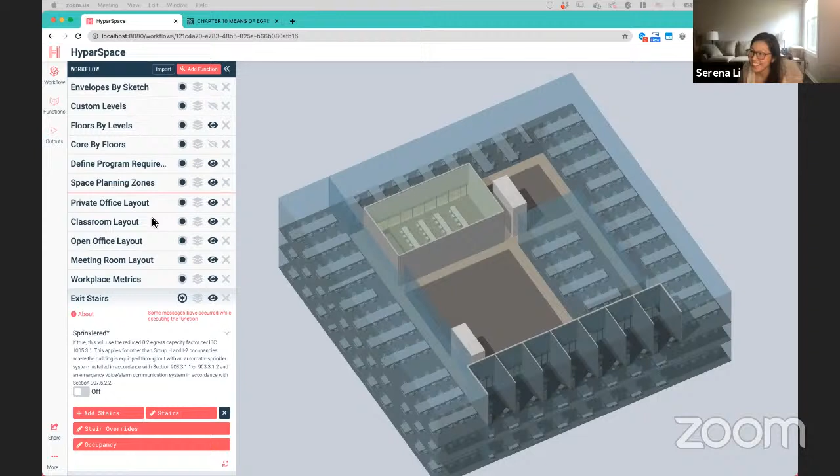Speaking of which, I own this office and I have many cats, and I think they should have their own room.

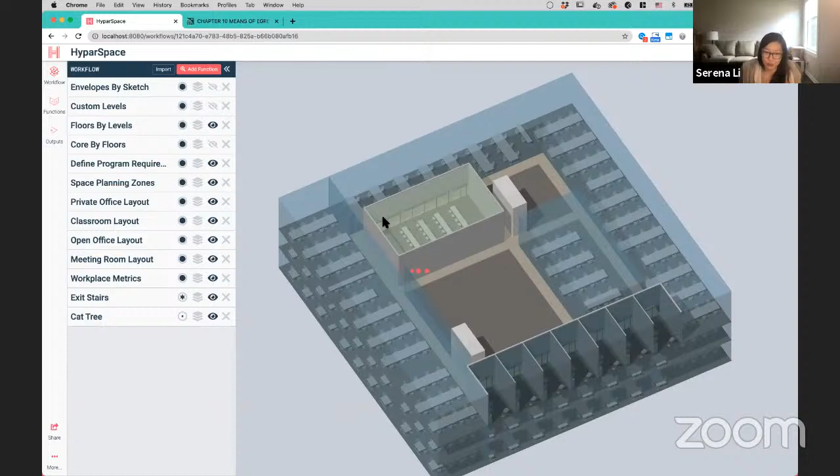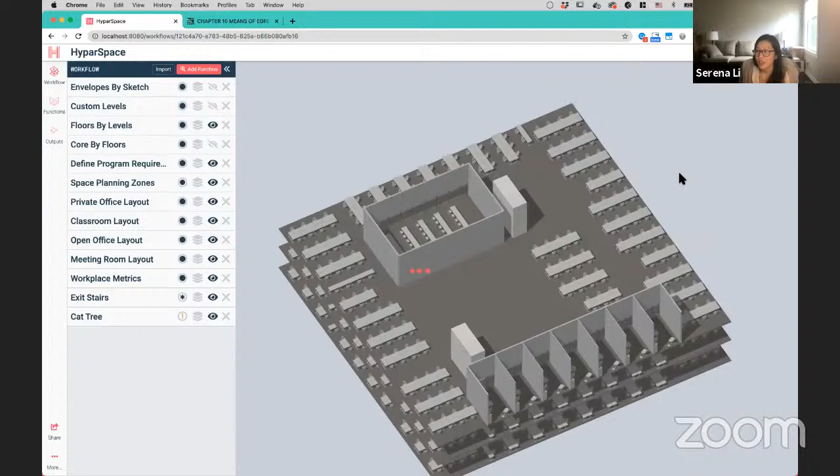So what does Hypar have to offer? Just for fun, this was an experiment, but there's a probably not that useful function on Hypar called cat tree. There's all these pre-baked, normal people program types in here, but I happen to know that cat tree needs a room to be assigned as cat tree. So I can assign cat tree to this room, and then hit save. This particular function, all it does is make a cat tree in a room that you give it.

Oh no, some warnings have occurred. Solution, blah, blah, blah. Well, maybe it did not like this particular room. Come back later for more cat tree. Actually, that's the first failure I've gotten with cat tree - I wonder if it's all of them. One second.

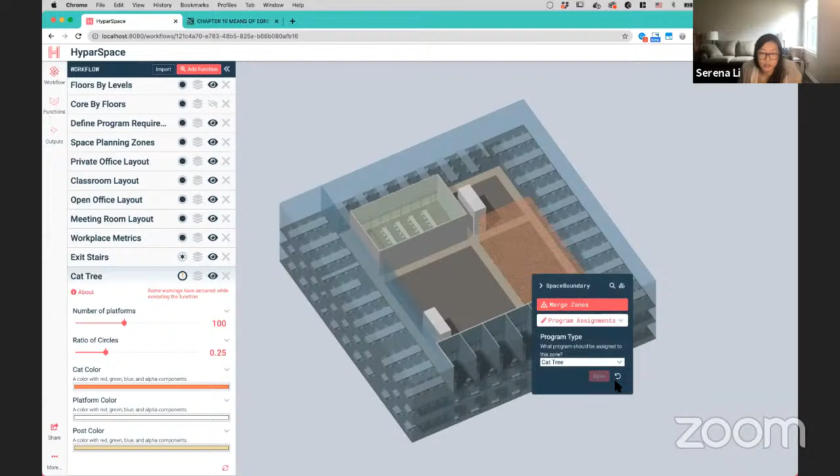I will stop sharing so I don't get self-conscious while I try to figure out how to get my cat tree to work. But basically, the point is that I was trying to make a new space type - I was trying to learn how to use Andrew's new spiffy Grasshopper 2, which is a much better and improved version of how to write functions on Hypar with Grasshopper rather than C# or Excel, which are other function types that we allow.

So for those unfamiliar, you can put logic on Hypar in many different ways. Exit stairs was written in C#, but cat tree, if I can get it to work, was done in Grasshopper. What that's going to allow us to do is have all of these functions written in the language and logic according to the strengths of whatever it is that they're best suited for.

So I'm going to try cat tree again and see what happens. But I will pass. I was trying to make a larger point, sorry.

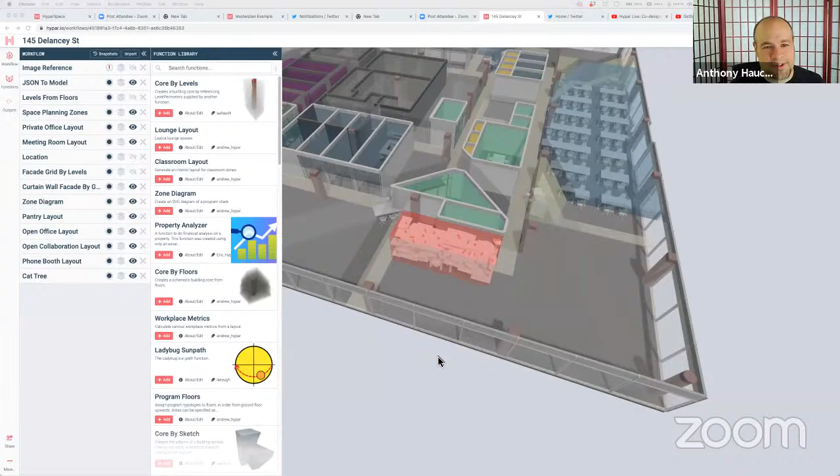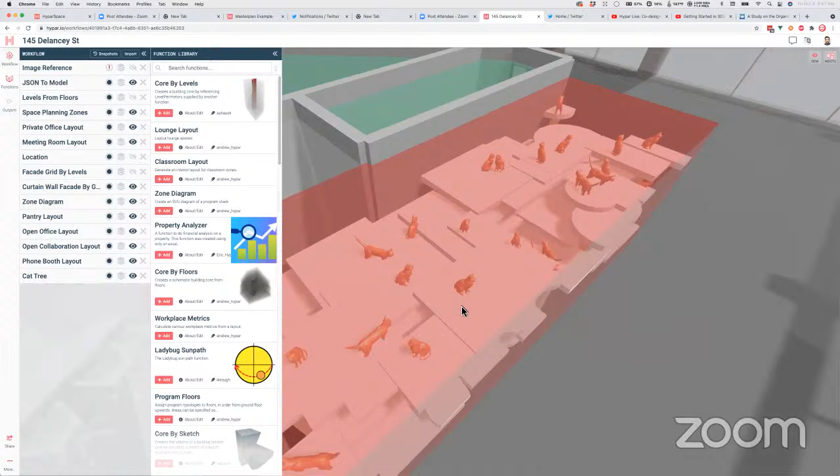For what it's worth, I do have cat tree working in my floor plan, if you want to show it. Show us the cat tree. Okay, one sec, it's very dense in there, this is a lot of cats. But I am, in fact, a cat entrepreneur. So I took this space and designated it as cat tree, and it has created the world's most incredible cat play structure right in the middle of this office. We can jump in there and see all of my little low poly cats enjoying really the time of their lives in the middle of this office. So this is Hypar HQ's future, I think. Right, that is true, a lot of us do own cats.

But yeah, so we can think about that at the level of granularity of just a room. And within the room, you can think of it at the level of granularity of just a chair. You can override the positions of individual chairs and tables in Hypar, and you can override how many occupants there are per floor. We can go all the way from pushing the bounds of going all the way down to the chair, but also go all the way up to an entire master plan campus. We're not designing Hypar for any particular scale of problem, just design problems in general that have constraints and are complicated enough that automation is not going to get the right solution, but can help a lot along the way.

So there's a question here about what our goal is, perhaps, with Hypar in a broad sense, and whether we're trying to replace other tools that exist. I want to highlight Hypar is on the same page in this regard. We want to make better buildings, and we think there are important things that need to happen to make better buildings exist in the world, including better tools for designers. Make tools that help designers make better buildings would be a sort of short-term mission for Hypar, and the long-term quest of just making buildings better. The built environment desperately needs expansion and improvement.